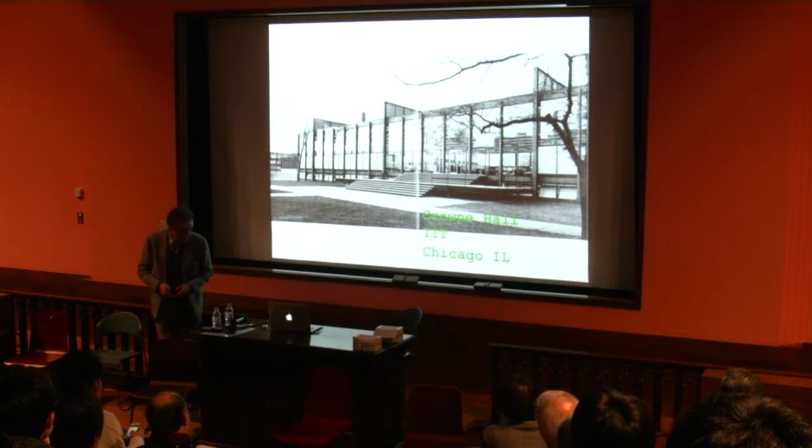If you look at Crown Hall, the building Mies van der Rohe designed for the Architecture School at IIT in Chicago, it's a structure supported on a series of plate girders above the roof, carrying below it the structure holding up the roof. If you look at the archive at MoMA and read the correspondence around this project, there was quite a lot of concern by the contractor that these girders would buckle sideways, lateral torsional buckling. There's a letter from the engineer, Frank Kornacker, to the contractor explaining how the rigid connection between these purlins and the girders was keeping those girders from flopping over.

It's not something most people are aware of, but I think the fact that these are standing up, and that at some level there's inherent instability embodied in them, is part of the energy and impact of this building. The other interesting thing is the ambiguity in the way the structure functions. From the outside, there are clearly primary and secondary elements, with the primary elements related to those girders. But when you step back, it becomes more ambiguous, and inside the building that relationship disappears altogether. I think that's part of what's interesting about Mies's work — this dematerialization or ephemeralization of the structure, from an outside that's very clear and didactic to an inside condition that makes it feel as if the roof is floating on light.

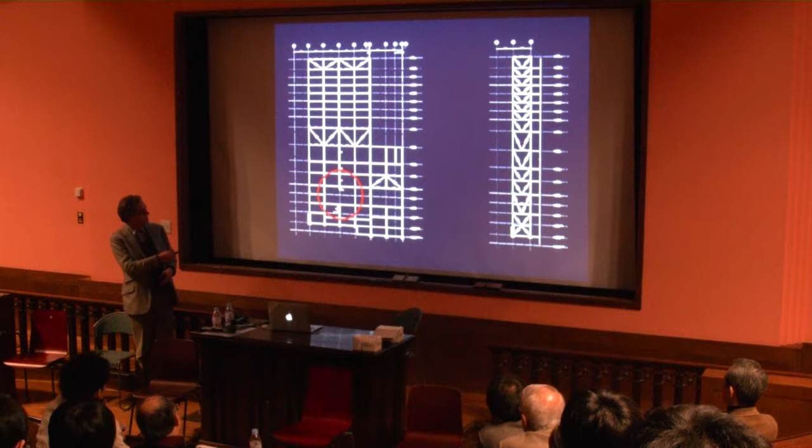It became part of the story around the project, and as people went around visiting the museum during construction, they were taken to this spot where this column had disappeared. It was explained to them that this was a very special place because the column that was once there had disappeared.

The second part of the project was the construction of this wall, which is very similar to the wall here at Ueno Park at the Horyuji Treasures building, except with the mullions spread further apart. Like that wall, it's built of steel bars spanning 20 meters vertically, held halfway up by these props.

These props hold them in and out of plane, but otherwise they're dependent on the rigidity of the joints to keep them from buckling laterally. So here again, the main focus of the design was to create as slender a member as possible.

These are 5 centimeters wide and they span 20 meters, as slender as possible to keep the thinness of the structure.

At the point where it connects to the tower part of the building, there's a spring, so that when they move relative to each other in an earthquake, there's no transfer of load. That in turn makes it more difficult for the stability of that structure to be maintained, but in the end I think it makes for a very thin and elegant structure.

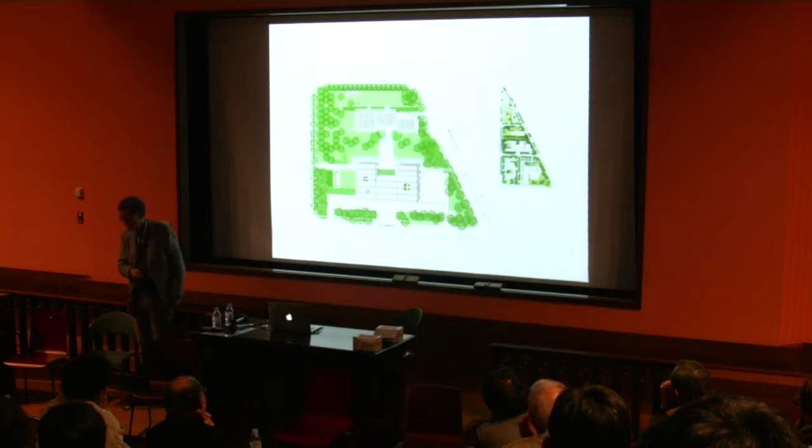This is the existing Kahn building. This is the new pavilion designed by Renzo Piano. This is the Kahn building. This is Kahn under construction.

What we did in this case to create a relationship with the Kahn building was build this structure out of wood. So here we have beams that span 100 feet from column to column, and they're paired sections of wood that are 4 feet tall, about this tall, and 8 inches wide, so 20 centimeters wide, and they're paired.

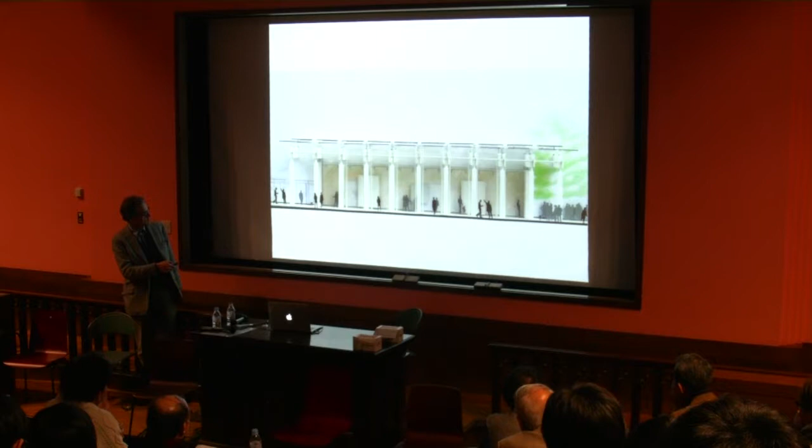They're 10 feet apart, there to there, and you can see there are 2 of them side by side. Here again, the challenge we created for ourselves was to make a very slender structure that would be really entirely controlled by its tendency to buckle laterally. So we were basing the design on the limiting case of the lateral torsional buckling of these beams.

Here they are on site. These are part of a metal system built inside between the beams. Here you can see a series of machined aluminum parts which effectively create a rigid connection between the pairs of beams, so that when they try to rotate side to side, there is stiffness that prevents that rotation from happening, as well as a transfer of lateral load through them acting as a kind of cradle side to side.

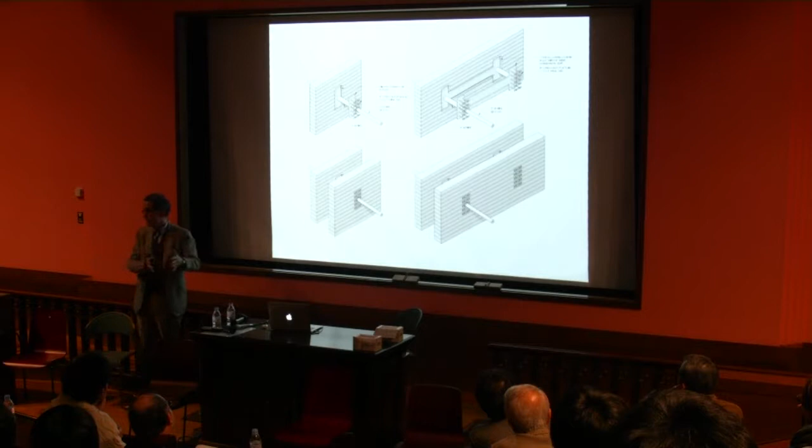So these, what we call dog bones, serve both the purpose of rigidity in the side-to-side direction, but also keeping the beams from rolling as well. There you can see them being installed.

There is a very fine horizontal brace system that holds the middle plane of the wood side to side, but the rotation of the wood, the lateral torsional buckling, again the same thing as Crown Hall, is prevented by this system of clips going across. This is the end piece that is here, where there's a rod that comes through here at the end and a post that holds the beam up.

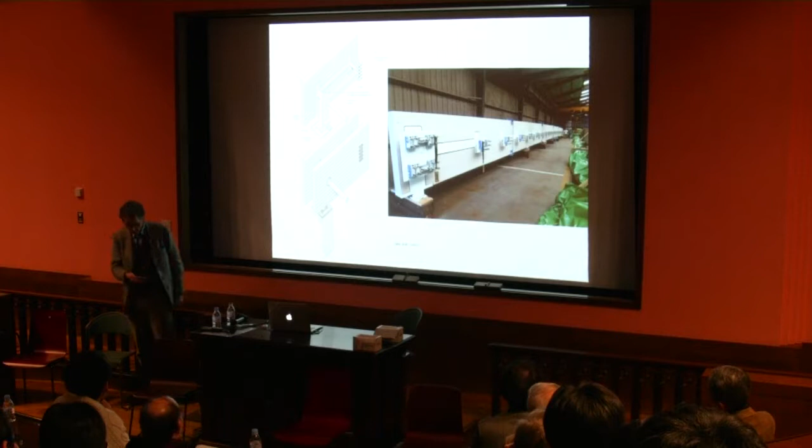There are sliding bearings at the end because it's held from below. It's important to let it move that way so that there are no end moments added to it. But you can see they're quite tall, quite slender. And again, the controlling factor here is the lateral torsional buckling.

Another project also under construction right now is the Corning Museum of Glass in Corning, New York, with architect Thomas Phifer. This is again a series of very thin beams, these are made of concrete, 2.5 inches wide and 4 feet deep, extremely thin, again controlled by the lateral torsional buckling of the system. These are renderings of those beams, and they serve as a light filter as well.

So all these projects, where in a sense the idea of the structure is not something apparent immediately, and maybe not apparent to most people at all, but maybe to an engineer coming in, or someone attuned to the normal thickness and thinness of things. There's a sense that there is inherent in the structure a certain tension or instability that is incipient, almost occurring. Related to that is this idea of thinness, which has to do not only with the way things appear thin, but there is a kind of ambiguity to the reading of the project.

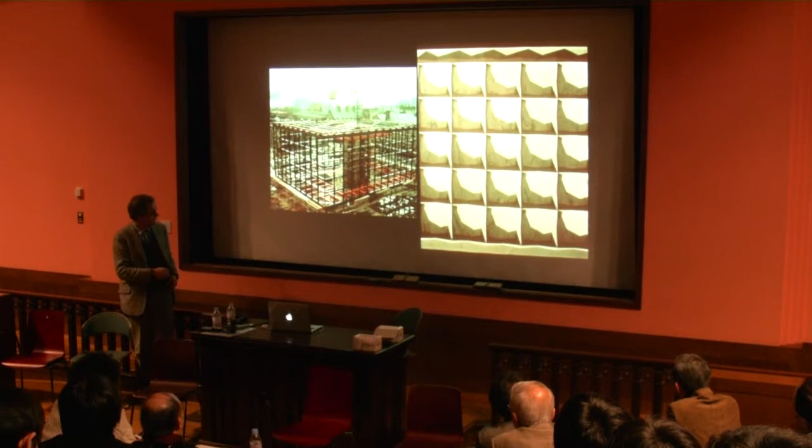The structure, as I said, is a Vierendeel structure. These are tapered members, so they actually go from being thin here to thicker at the crossing, like butterflies almost, and they come around and create a cage that holds out the outer part of the building, supported on these pillars. So I think there's something there

that is stimulating in a way to both architects and engineers because of the ambiguity of the reading, because of the difficulty there is in being able to disentangle what is surface, what is texture, and what is structure. And at the same time, once you've understood it, there's a clarity and intelligence about both of those elements.

The World Trade Center, designed by Les Robertson, that Sasaki-san referred to earlier, is another case, slightly different, that I think refers to this idea. The building was a tube frame, actually made almost entirely of Japanese steel on the outside.

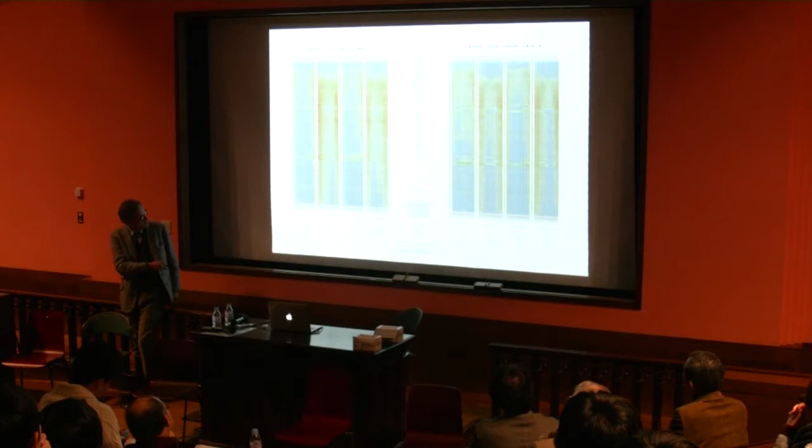It was constructed, as it turned out, using 14 different types of steel. This is a drawing that my students did at Princeton for an exhibition at the Museum of Modern Art on tall buildings, which occurred a couple of years after September 11, 2001. We took the construction documents of the building from Robertson's office and drew on them.

We drew the type of steel that existed throughout the structure. The structure was designed as plates welded into sections, boxes for the columns, and solid plates for the beams. It makes a kind of cage structure all the way around, which makes the perimeter rigid and very effective against the wind. The type of steel varies quite a bit - you can draw that situation and see that as you move across each face of the tower, you get blue for low-strength steel and red for high-strength steel, with variation in between.

The reason why Robertson did this is very interesting. If you look at these tube structures, what happens when they resist lateral loads is that there's a tendency for forces to stay concentrated in the corner, something called shear lag. So even though you want the thing to behave as if it was a complete tube, it doesn't, because there's difficulty for the forces to work their way around the corner.

What Robertson did was counteract that effect by using very high-strength steel in the corners. Because he was using high-strength steel, he was able to reduce the size of the steel, making it softer due to less plate thickness. As a result, the forces tended to migrate away from the corner into the body of each face. He was consciously moving the forces around by using different types of steel to get smaller member sizes in places he wanted to unload in favor of other parts. So what you see in this drawing is a very conscious effort in directing the flow of forces.

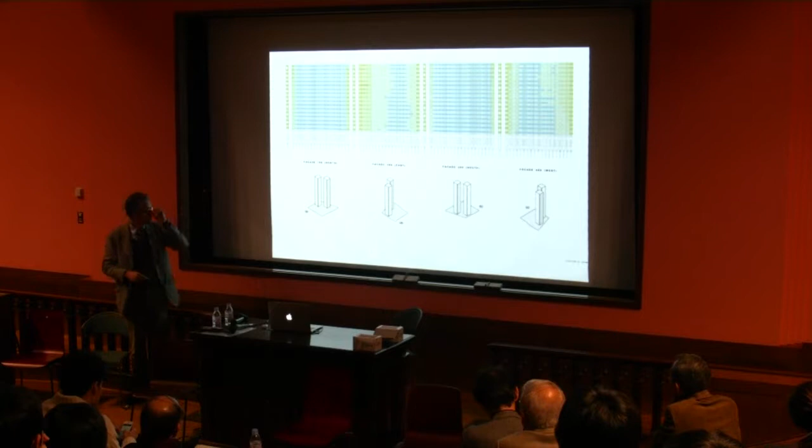The other thing is this was the first building built in the United States to use a wind tunnel. Because these are two buildings side by side along the waterfront in New York, there's a very different kind of wind climate going around this building. The wind from the northeast and northwest tends to be stronger, but these buildings shelter each other because of their relationship. So the determining factor for these forces was a function of that wind environment and the relationship between the two buildings.

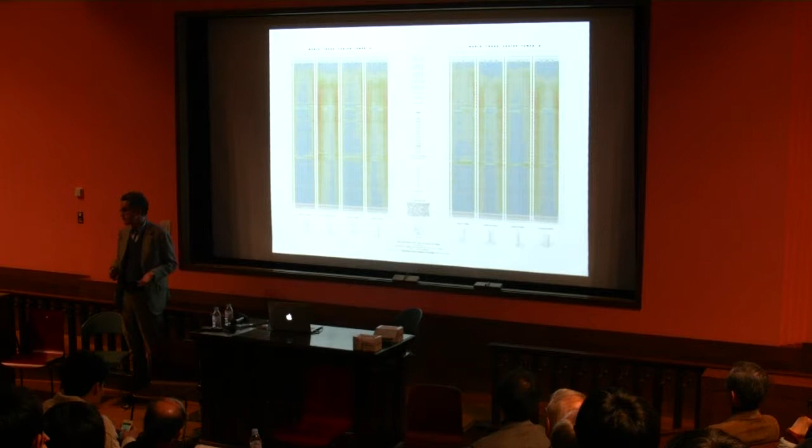What you see is a combination of all these factors - the way the wind environment is influencing the forces, the way the relationship between the two buildings is influencing the force, and the way Robertson himself was trying to redirect those forces. It's a very complex and interesting way of reading what's happening in the environment, in the structure, and the engineer's intention - all of which is invisible in the final structure and only revealed if you go into the construction documents and read it through this kind of interpretation.

A project we did a couple of years ago, an exhibition at SciArc, we tried to figure out a way to get something to be perfectly flat while it was very, very long. This is a 40-foot long beam which we were hanging from above, and we tried to make this out of little plates of steel that we would bolt together against the form we made, basically shaping that beam so it was the opposite of what it would want to be when it deflected. It was an experiment that didn't altogether work, but it was an attempt at getting that kind of unexpected flatness through this process of fabrication.

This was trying to put it together. Things started to fail, so we ended up having to clamp it, and it was an experiment that was a lot of fun. It didn't quite work out, but it definitely taught us something about the ways to express an idea.

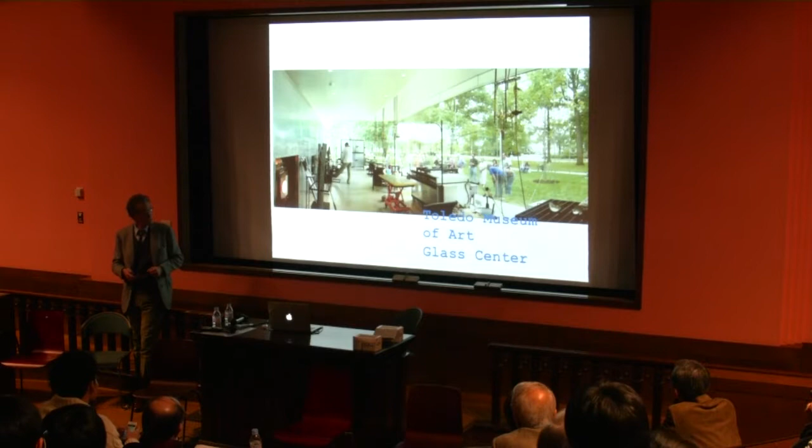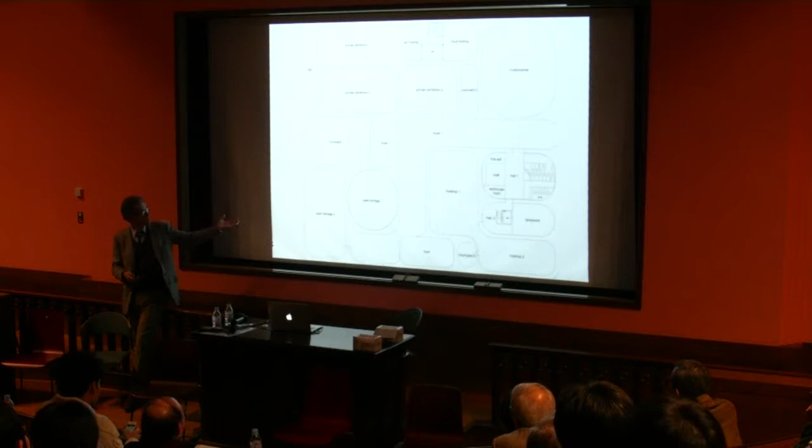Toledo, which was the first project that we did together, was a remarkable experience for me. Coming into this project at the beginning, I was shown this image and told that this was really what the building was going to be, which I had a tough time at that point imagining, but in fact that's what we ended up with.

One of the things that was quite fortuitous was that because the column locations were determined by their ability to be placed in relationship to the rooms, they don't line up. So when you go into the space, you can't really tell what is holding up the roof. And most people go away thinking that it's the glass that's holding up the roof.

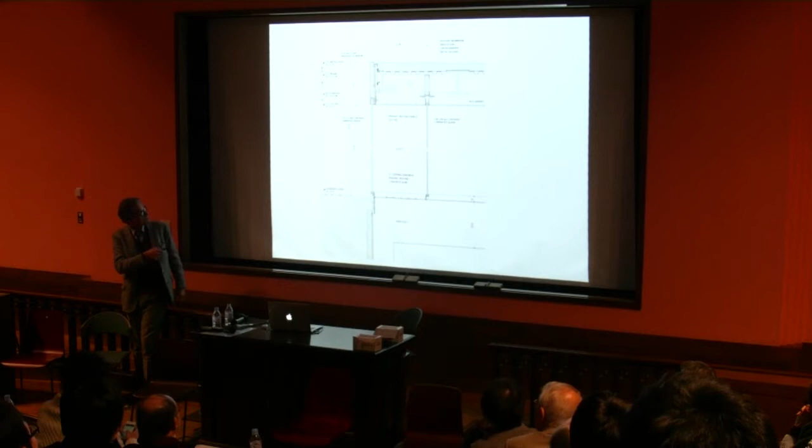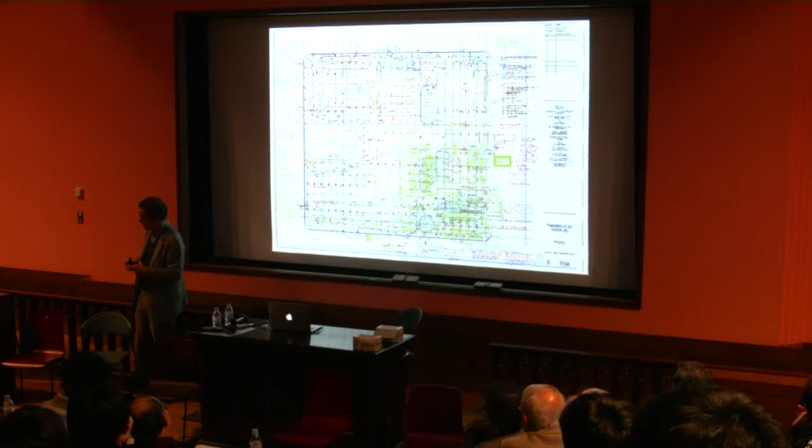The package was very thin. This was kept to 2 feet, so it was very complex to get everything to fit together. We had to embed all the utilities and make sure there was enough clearance even between the bolts and the glass passing through. These were some of the coordination drawings. It was really almost like designing a printed circuit. Sometimes when you look at these drawings, it was as if we were looking at some sort of Intel chip that we were working through.

Here you can see how the glass shoe has to get by very tight tolerances relative to the rest of the structure.

The new museum. So in Toledo, the challenge was to make the horizontal surface as thin as possible. In the new museum, the challenge was to make the vertical surface as thin as possible. And as Sasaki-san showed, we had a structure made of trusses stacked up all the way up, so that each box, in effect, became a kind of truss structure holding itself up.

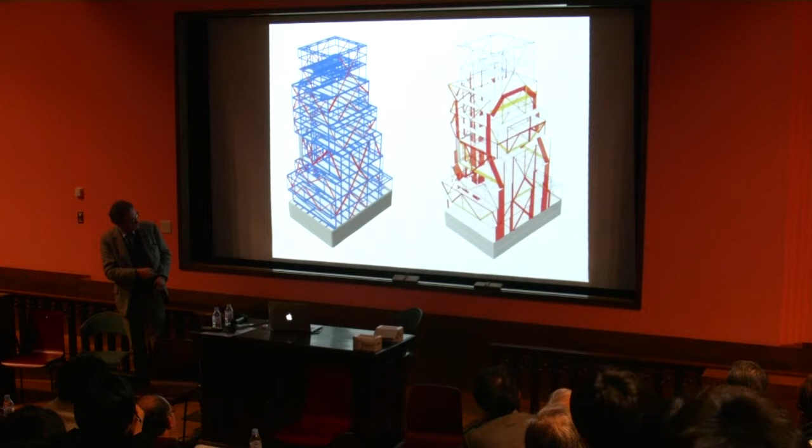The shifts in the plan create glass skylights that bring light in. The diagram, as you've seen, of the forces. One of the interesting spots was this point where the shift is on a diagonal.

And so here these are the structure that you see on the inside. But in that corner, we were able to support the structure from above. So when you go into that space on the second floor, there's a nice mysterious moment where you can't quite tell what's holding up this floating corner of the building above. And you saw the diagram earlier that Sasaki-san showed of how that worked.

The last section I wanted to talk about is to do with vortex. Vortex is a term that I got originally from Ezra Pound, the American poet. In Pound's case, it referred to cultural moments where there's a remarkable convergence of influences that makes a project or a historical moment particularly significant.

I think one of those situations, and this has to do a lot with the idea of collaboration, is the Menil Collection in Houston, which was Renzo Piano's project, working for Dominique de Menil and working with Peter Rice and other engineers at Arup. What was remarkable about the project is that it was a moment in the careers of all involved where they could work something together that was truly innovative and unusual.

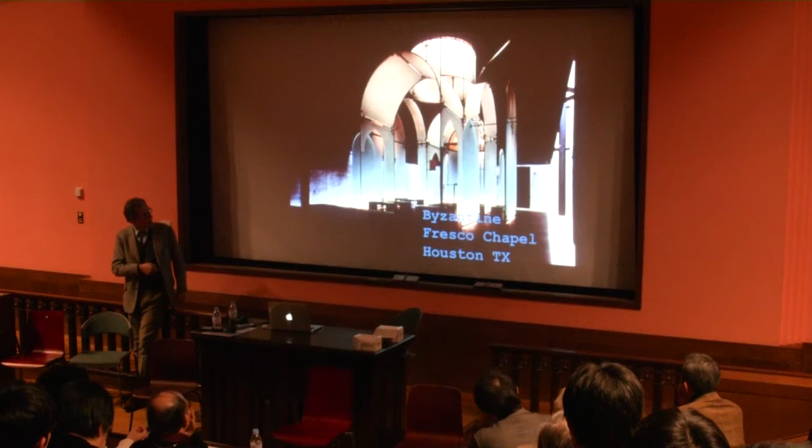And it's a structure made—this is the outside of the building. It's a lattice of rods pulled in tension between the roof and the floor, and then a system of glass panels attached inside that. The project was up for 15 years. It's since been dismantled, and the frescoes have returned to Cyprus. So this is a project that had a very limited life.

This is it under construction. You can see the rod system there, and these are the glass pieces being put in.

This is a small glass stair that we did a couple of years ago, which had a famous visitor a few years later. This is based on a principle that has to do with torsion, something called the cantilever stair.

This is a stair that Palladio designed at the Accademia in Venice. This is an even older stair that I found on an island in Greece.

Basically, the principle of these stairs is that each step is supported by the step below, and below, and below, coming down to the ground—which allows the steps to be connected only on one end to the wall. So they're sometimes called cantilever stairs, but they're not really cantilevers. What's happening is that one end is built into the wall, the other end is free, and each step is leaning on the next one. So the only thing the wall has to do is resist the twist.

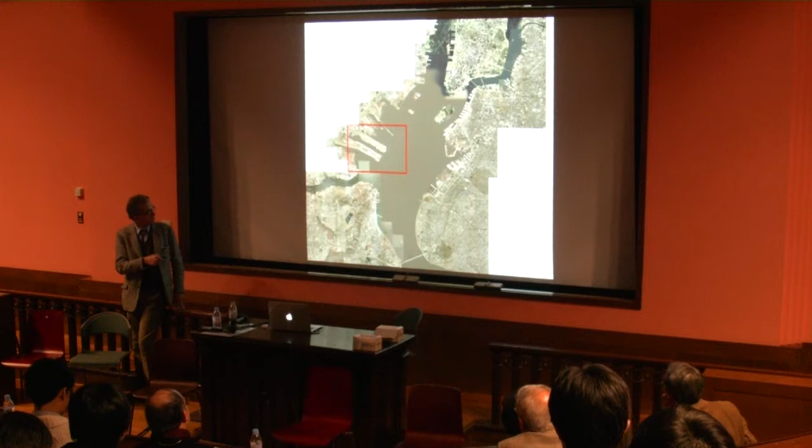There was a period where the Port Authority, responsible for the buildings of the World Trade Center, was thinking they might want a separate facility for the broadcast tower. So we came up with this design we call 7 Stems, made up of 7 tubes that come up and bypass each other so they don't intersect. They're always independent, and connected every so often by beams that run between them.

It's a 2,000-foot-tall, about 600 meter tall structure that is a vertical pyramid. That's a plan view of all the connectors that occur every 70 feet as you go up.

Now, one of the things we were interested in was the possibility of placing the tubes relative to each other in such a way that we would minimize drag. There's some interesting research done for hanger cables on suspension bridges showing that if rods are a certain distance apart, there are actually certain benefits from an aerodynamic drag point of view.

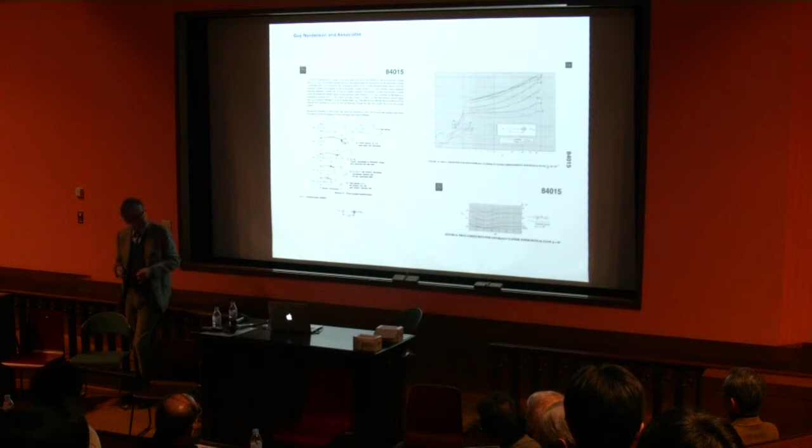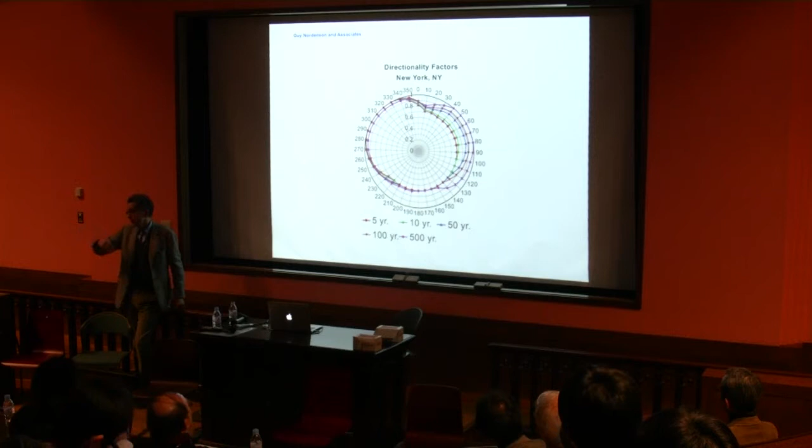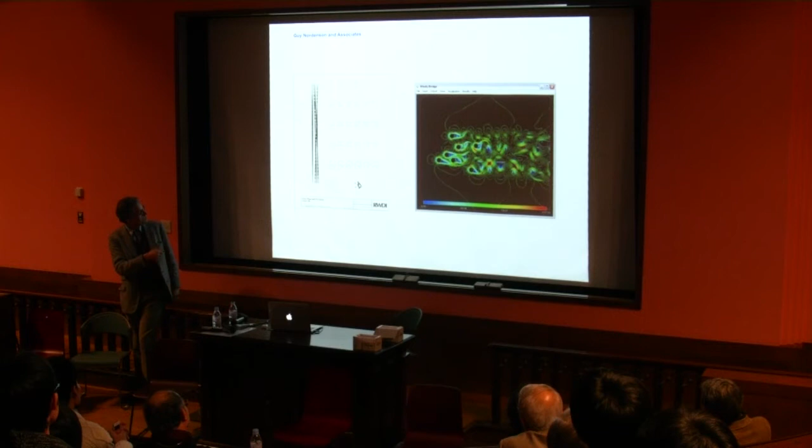So we wanted to see whether we could orient each of those stems such that the wind drag would be minimal in relation to the maximum wind forces that come in—the hurricanes from the northeast. In effect, a way of tuning the structure to provide the least resistance in the direction of the greatest wind. So we did some computational fluid dynamics studies looking at ways to minimize the drag.

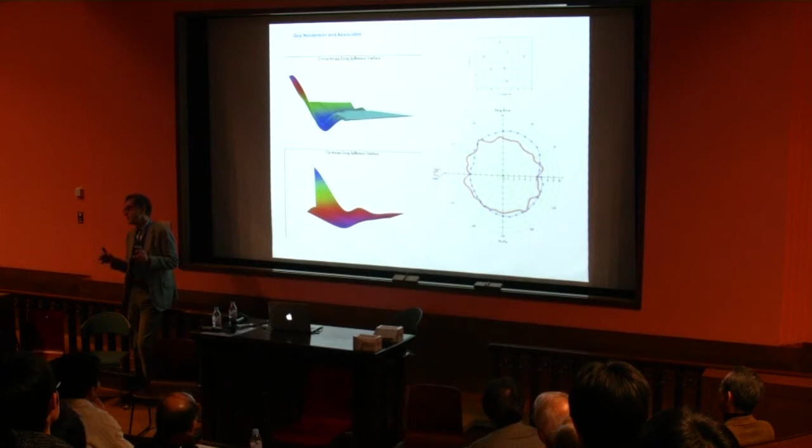A colleague of mine developed some surfaces based on the experiments I showed you. In effect, we created what we call the drag rose, a representation of the drag, which we could organize so that it was minimal in the direction where the wind was maximum. In effect, trying to find a way to express the wind environment through the arrangement of the structure, along the lines of what Robertson had done in a different way with this tower and the World Trade Center.

The final project was, in a way, inspired by this tower.

We were working on the tower for this location, and as we were working on it, I became quite interested in this part of New York, which is called the Upper Harbor, the bay, much like Tokyo Bay, the bay that is inside and the harbor for New York.

Having grown up in New York, it struck me that this was not a place that was very familiar or thought much about by people that live there. But as the city has become more and more regional, it seemed to me that this is a place worth considering as a potential public space in the city.

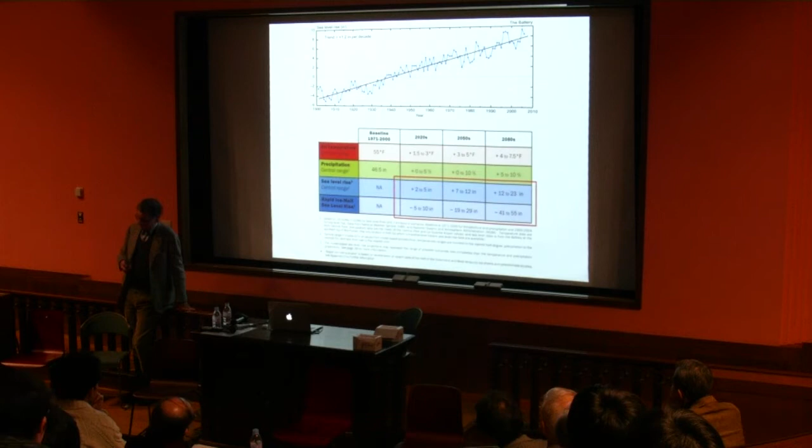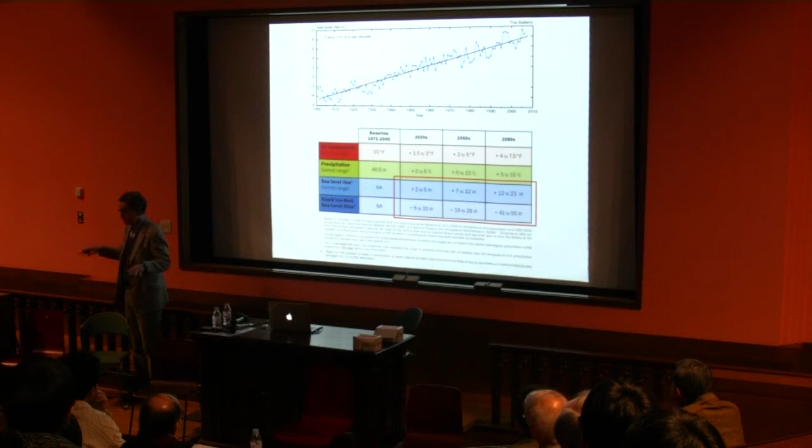Together with that, we wanted to think about sea level rise and the consequences of climate change. New York has a particularly high sea level rise predicted because there's a combination of the ground dropping as well as the sea level going up. So compared to other places around the world, it actually has more sea level rise predicted than some other places.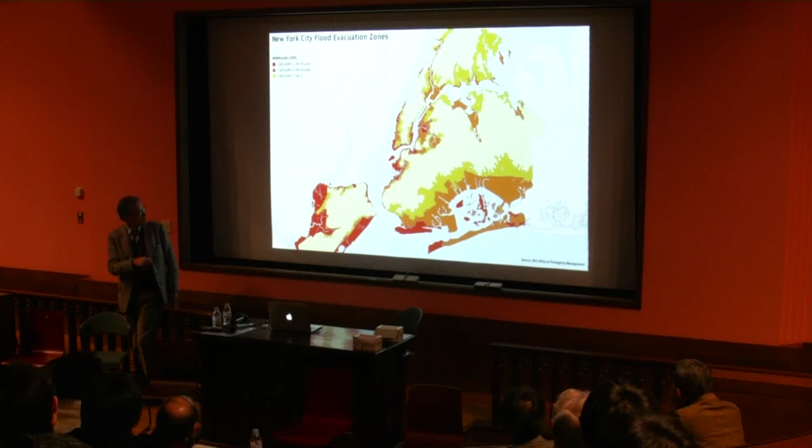We already have flooding, and as you may have heard, we had a bad storm recently where the flooding was quite extensive. So for different categories of hurricane, large parts of the city are susceptible to being flooded.

So what we were proposing was a project that had two main purposes. One was to create a public space in the region out of this body of water, to make it much more accessible and much more part of the region—a little bit like Tange's project for Tokyo Bay many years ago—occupying the bay, in this case with more natural islands and other structures, not so much with buildings.

But this is still something that hadn't been proposed in a long while because of concerns about environmental impact. What we were saying was, because of the environmental changes that result from climate change, we need to think about ways we can add things to the bay, wetlands for example, which are going to get lost because of sea level rise.

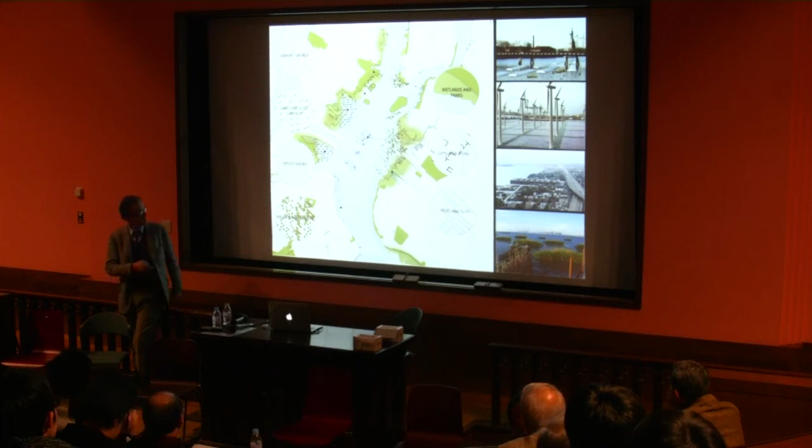So we proposed this approach. We argued that in some ways it does for the region what Central Park did in the 19th century for Manhattan. When Central Park was built, there was nothing around it. But by creating an empty space and defining the boundary of that empty space, it created the edge that Manhattan has since come up to and surrounds—this big public space that's so important for New Yorkers.

Similarly, in Venice, the basin at St. Mark's is a public space. Space for boats goes out, but it's still public space—public space that can be on the water.

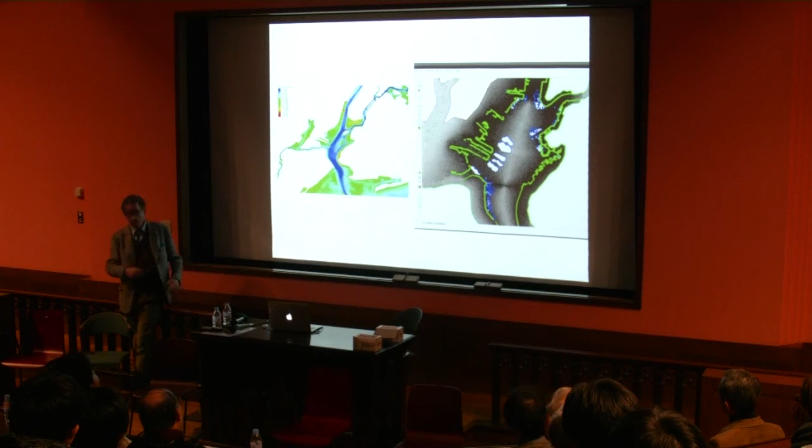Part of this was a scientific study. We wanted to see whether this idea of putting islands in the bay would actually help us from a storm protection standpoint. So we built models of the bathymetry, the topography under the water, combined those with the topography of land, and had digital models we could use to do computational simulations to look at the storm surge coming into the bay, and see if the production of islands would have any benefit—without islands versus with islands, what would be the results?

We worked together with colleagues in engineering to create an artificial hurricane, basically, a hurricane that was displaced, which we could then use to generate the storm surge.

What you find is that the height of the storm surge, in this case 3.5 meters, is no different with or without the islands, but the velocity is different without the islands.

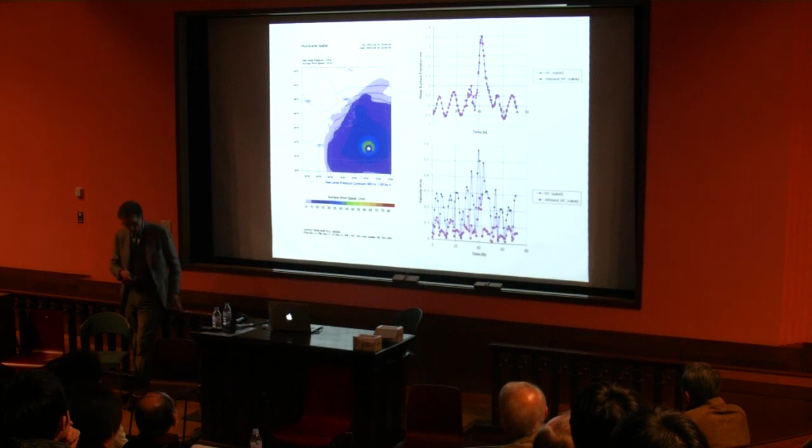If you think about earthquake engineering, which is something I've been involved in over the years, it's very similar to the idea that through ductility or energy dissipation, you're able to diminish the impact of a natural force on structures. So in this sense, what we're trying to say is that these barriers, these obstacles in the way of the storm surge, have the role of dissipating the energy of the storm and making things better for structures that are on land.

So this is a somewhat whimsical idea, but using subway cars, which are in fact used offshore to build reefs, windmills, and wetlands that could be the replacement of wetlands submerged under rising sea levels.